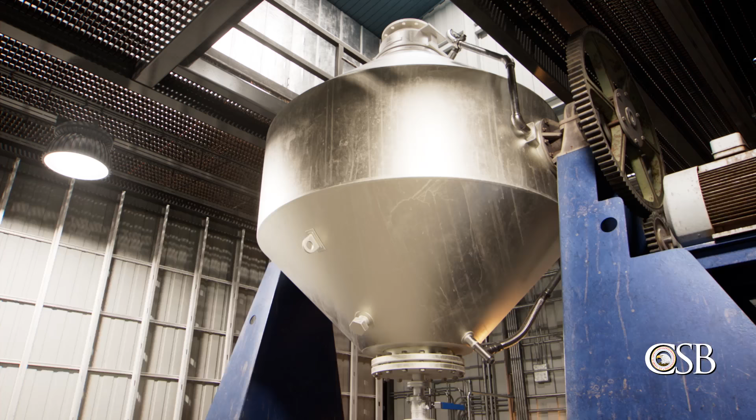December 8, 2020, the Optima Belle chemical facility in Belle, West Virginia. One employee was killed and 2 others were evaluated for respiratory irritation when a pressure vessel exploded, causing a fire and toxic chemical release. Our report identifies several factors that led to this tragedy. In particular, we have found that gaps in existing regulations do not adequately protect against hazards presented by reactive chemicals. This long-standing safety gap must be addressed.

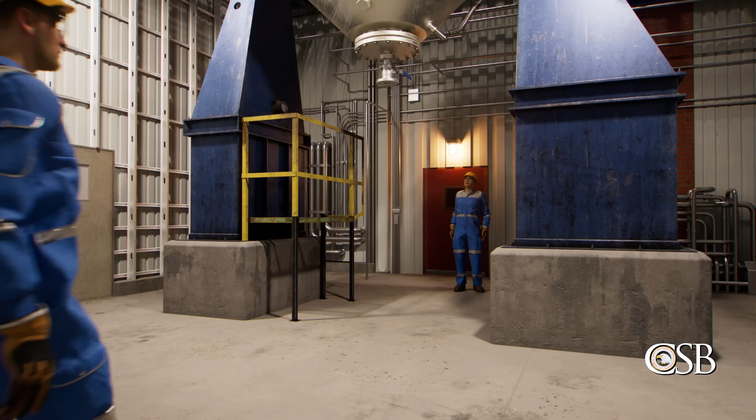Optima Belle is a toll manufacturer, or a company contracted to provide chemical processing services, typically using its own equipment. On the day of the incident, Optima Belle was working on behalf of Clearon Corporation to conduct a batch tolling operation. The tolling operation involved Optima Belle dehydrating a chemical called CDB56.

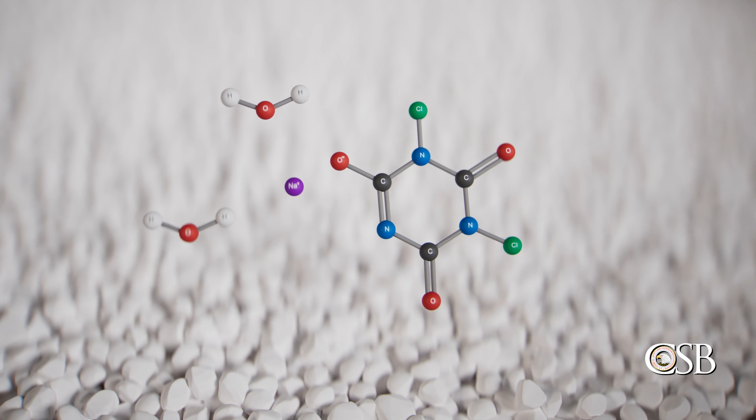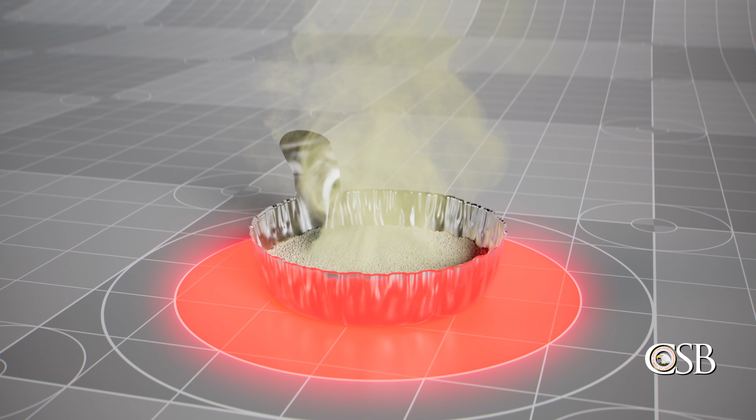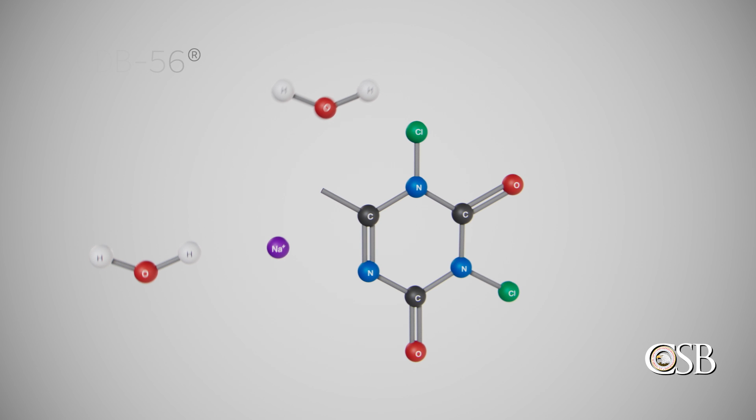CDB56 is a white powder used as a source of chlorine for cleaning and sanitizing products. When CDB56 is exposed to high heat, it can decompose and release chlorine and other toxic substances. The batch operation was intended to dehydrate CDB56 to transform it into a different compound that Clearon calls CDB63. CDB63 is a white granular material used for water chlorination in swimming pools, as well as in detergents and bleaching agents. Like CDB56, it can also decompose and release toxic chlorine when heated.

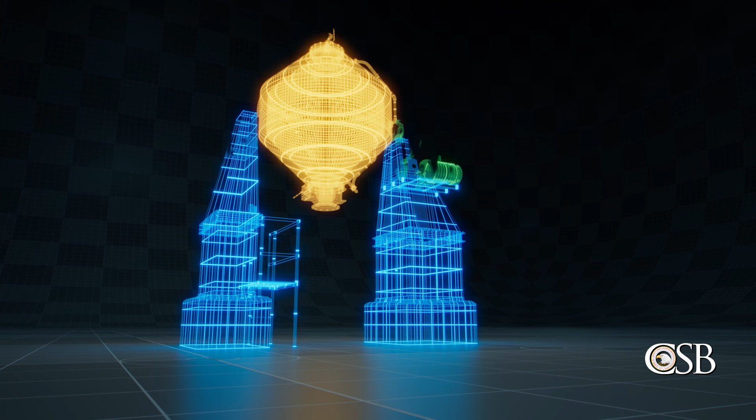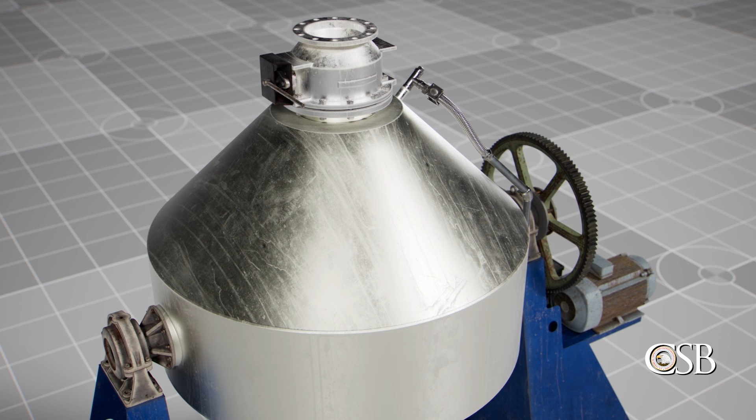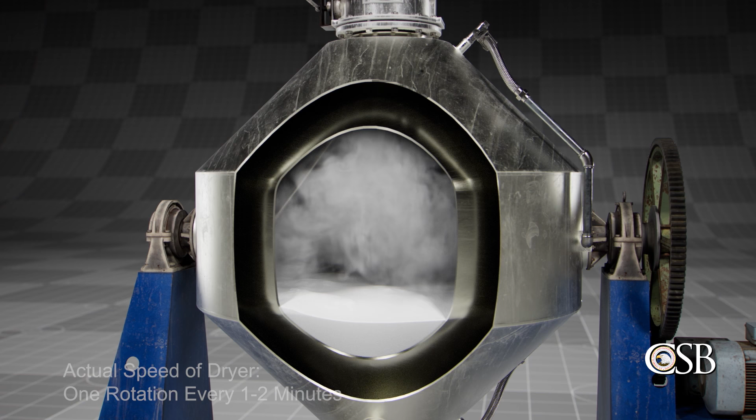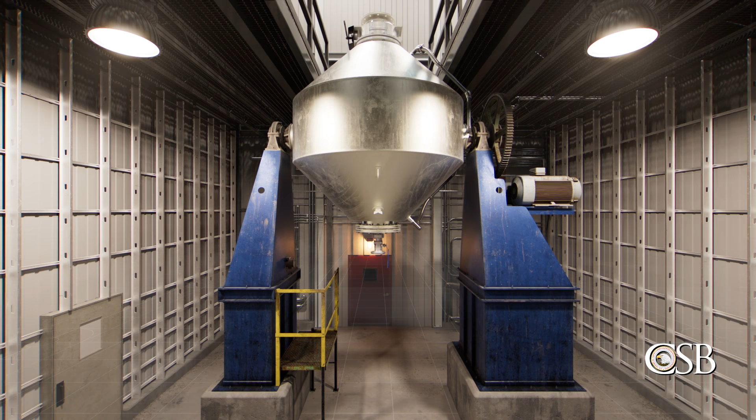For the batch dehydration process, Optima Belle planned to use a type of pressure vessel called a rotary double cone dryer. Clearon, however, had never before used this particular kind of dryer for dehydrating CDB56. Therefore, Optima Belle developed a new procedure for the dehydration operation. Their plan was to heat the compound by applying steam to the jacket of the rotary double cone dryer, while the dryer rotated to tumble the contents inside. Equipment would be used to create vacuum conditions in the dryer to help remove any gases produced, such as water vapor. Optima Belle, however, did not realize that heating CDB56 inside the dryer could cause the compound to decompose.

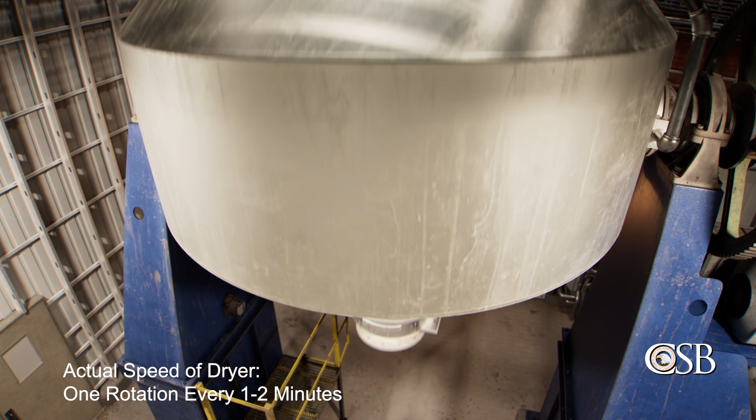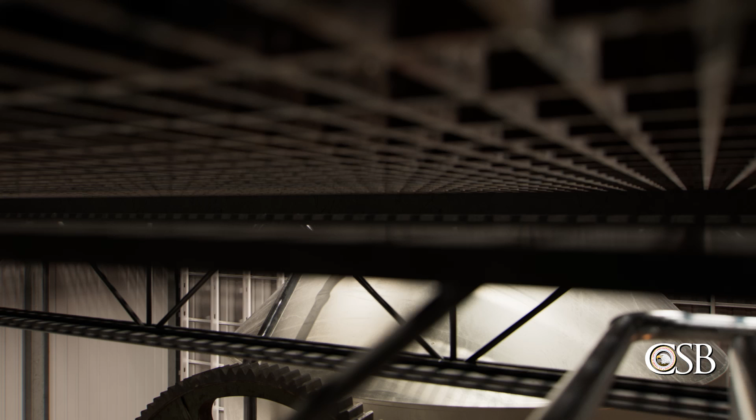On the morning of December 8, 2020, Optima Belle employees started the first of 4 planned batch operations to dehydrate the CDB56. They applied heat to the dryer, and workers from both Optima Belle and Clearon monitored the progress. But by late afternoon, workers observed some operational problems. They stopped the dryer to troubleshoot. About an hour later, they restarted the dryer's rotation, and steam was reintroduced to the dryer's jacket.

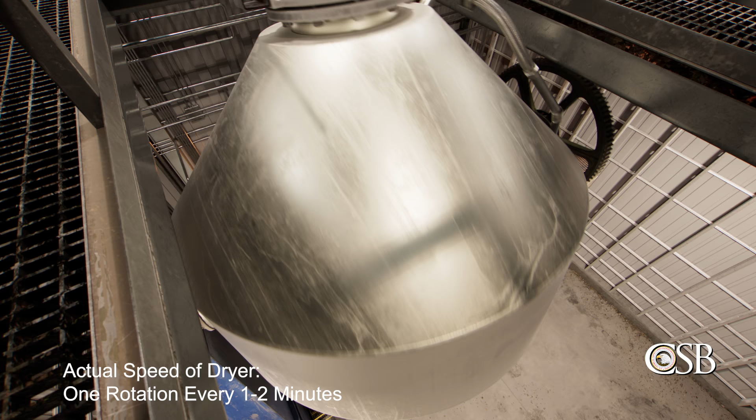But problems persisted. A sample of material taken from the dryer around 7:30 p.m. showed that moisture levels of the compound were not decreasing as expected, and now the white material contained dark specks. After Optima Belle texted Clearon about the issue, workers stopped the flow of steam to the dryer's jacket and stopped the rotation of the dryer to investigate the cause. Both Optima Belle and Clearon workers suspected that the dark specks could have been due to corrosion of 2 stainless steel valves on the dryer, which was otherwise constructed of a corrosion-resistant material.

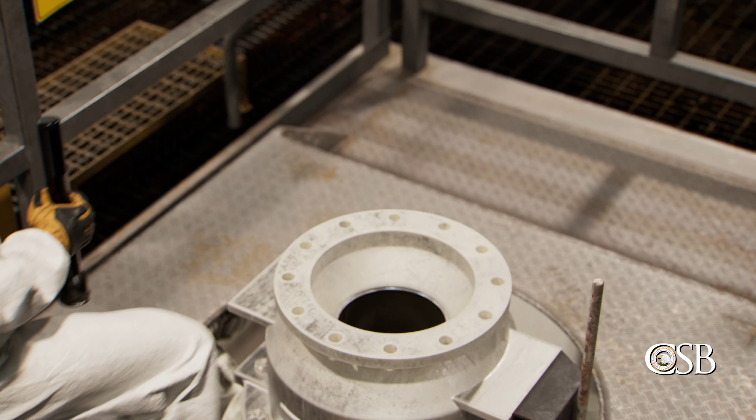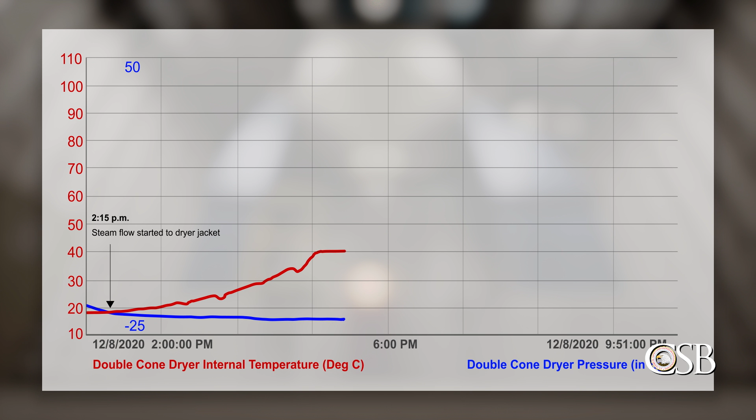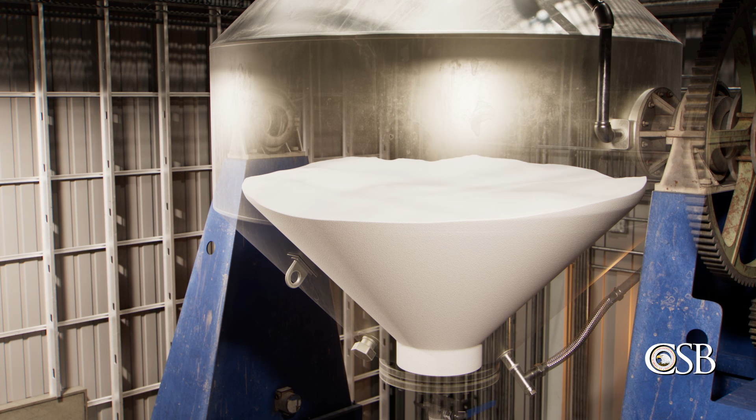Later, an Optima Belle employee told the CSB that when looking inside the dryer to investigate the suspected corrosion, the compound inside appeared lumpy with a yellowish tint and smelled like chlorine. While the workers were troubleshooting, the internal temperature of the dryer continued slowly increasing, even though no steam was flowing into the dryer's jacket. That is because, unknown to the workers, the earlier heating of the dryer had likely caused the compound inside to start decomposing, and a dangerous runaway chemical reaction was now underway.

Workers continued troubleshooting, and by 9:30 p.m. Optima Belle and Clearon agreed to stop the batch operation for the night and continued to investigate the cause of the black specks the following day. But at approximately 9:40 p.m., the decomposition reaction underway in the dryer increased rapidly, causing the temperature and pressure inside the dryer to spike. Within minutes, the dryer catastrophically exploded.

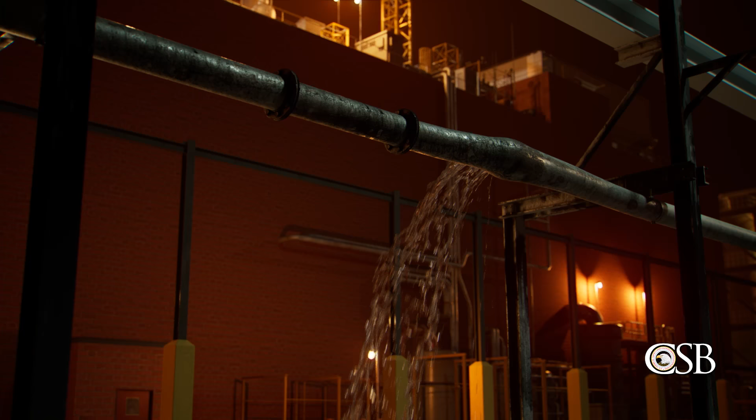Metal debris from the explosion struck a nearby methanol pipe, causing it to rupture. The released methanol ignited, and a fire broke out. Other metal fragments from the dryer were found up to a half-mile from the site. One Optima Belle employee was killed. 2 others were evaluated for respiratory irritation, and 1 member of the public reported an injury related to the explosion.

The CSB launched an investigation and found 5 safety issues contributed to the severity of the incident. They are process knowledge management, thermal hazard assessment, equipment selection and design, tolling of hazardous materials, and regulatory coverage of reactive hazards. The first safety issue is process knowledge management.

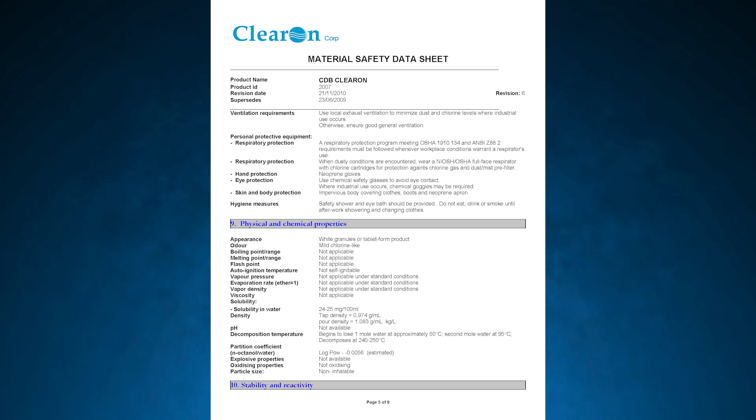As part of their tolling agreement, Clearon provided a technology package to assist Optima Belle in the development of the design and operating procedures for the dehydration process. But the CSB found that Clearon's technology package was inadequate and lacked critical known information on the decomposition of CDB56. For example, Clearon's own safety data sheet for CDB56, which was included in the package, listed its decomposition temperature as between 240 and 250 degrees Celsius.

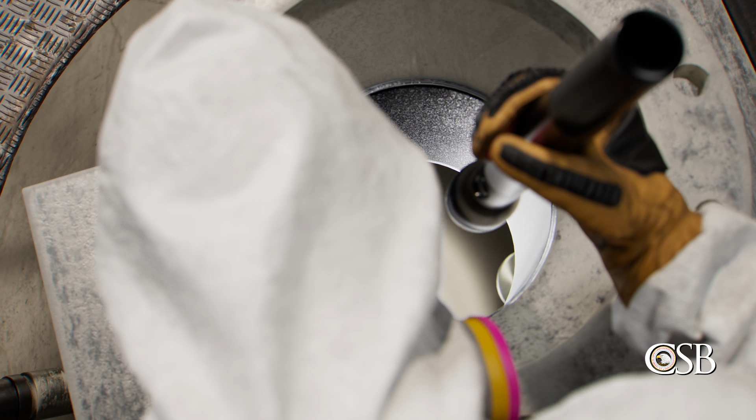But the CSB found that in the 1970s and 80s, a Clearon predecessor had conducted testing that showed CDB56 could decompose at much lower temperatures. These findings were documented in a report that Clearon had in its possession, but did not provide to Optima Belle as part of the technology package. Post-incident testing of the material confirmed that CDB56 could begin a runaway decomposition at just 81 degrees Celsius. Because Optima Belle was not provided this crucial information, the company believed the dryer temperatures would be low enough to avoid a runaway decomposition reaction by design.

Accurate process and product knowledge is essential for the safe operation of chemical processes. There can be little expectation of safety if the companies operating a process don't fully understand the chemicals and their associated hazards. Our investigation found that Optima Belle lacked crucial information on the decomposition of CDB56.

Accordingly, we found gaps in the ways that Clearon maintained and managed its key process knowledge, particularly in the way that it managed that knowledge with respect to its toller, Optima Belle.

As a result, the CSB made a recommendation to Clearon to develop and implement a comprehensive process knowledge management program, or evaluate and revise existing process safety management procedures to ensure consistency with industry guidance publications. And the agency recommended that Clearon update its CDB56 safety data sheet to more accurately represent the known hazards of the compound. The second safety issue involved in the incident is thermal hazard assessment.

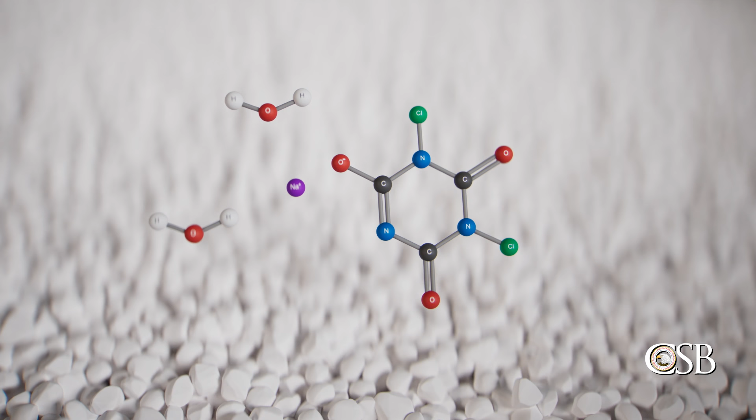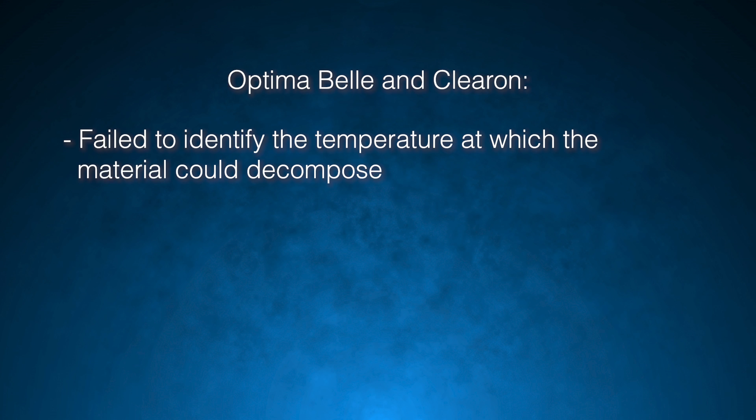The CSB found that both Optima Belle and Clearon failed to effectively assess the hazards of CDB56 and the batch operation. For example, both companies failed to identify the temperature at which the material could decompose, failed to conduct adequate literature searches for public or internal safety data, and failed to use readily available reactive hazard screening methods to assess the reactivity of the material.

Had Clearon or Optima Belle performed a thorough thermal hazard assessment, the parties could have understood the hazards of the dehydration operation, and the explosion could have been prevented.

There are many publicly available tools that companies can use to screen new or existing chemicals for reactivity hazards. Some of them are simple screening tools that can be used to quickly determine if further research is required. Others, like differential scanning or accelerating rate calorimetry, provide detailed, quantitative lab results that can be used to design a safe process. Using these thermal and reactive hazard assessment tools and developing processes accordingly can prevent tragic accidents like the Optima Belle explosion.

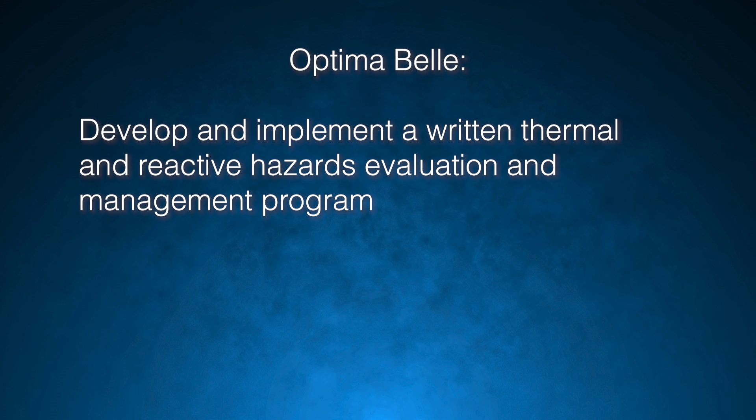In its report, the CSB recommended that Optima Belle develop and implement a written thermal and reactive hazards evaluation and management program.

The third safety issue that contributed to the incident at Optima Belle is equipment selection and process design. Optima Belle used existing production equipment for the batch tolling operation, but the CSB learned the equipment was not designed, sized, or re-engineered for the process.

As a result, the dryer was unable to quickly cool the contents if they became overheated, nor was it able to relieve the pressure generated during a decomposition.

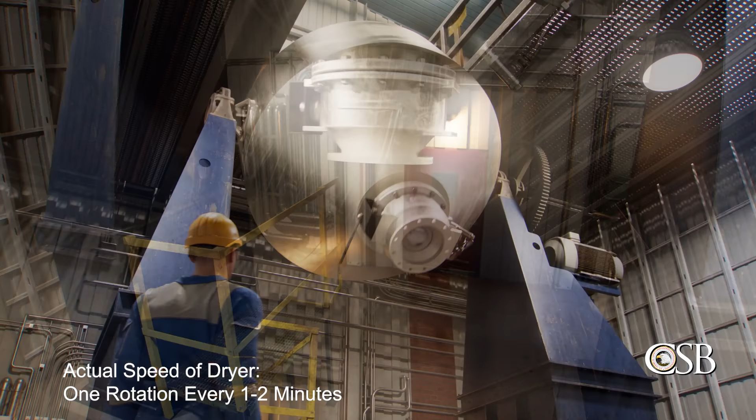On the day of the incident, Clearon and Optima Belle essentially conducted an experiment on a new method to dehydrate CDB56 at full production scale. This was done without first experimenting at a laboratory or on a smaller scale, which could have alerted the company of hazards and led to changes in the process. Instead, the end result of this decision was a catastrophic explosion.

We found that Optima Belle's pressure relief system for the dryer was not designed or evaluated to relieve the pressure produced by the decomposition of CDB56.

When using existing equipment for a new process, companies need to ensure that the equipment design is appropriate for the proposed new process. Had pilot or lab scale studies been conducted, Optima Belle and Clearon likely would have gained additional data on CDB56 and improved process knowledge. This might have led to changes in the equipment or process design, potentially preventing the explosion.

The fourth safety issue found by the CSB is the tolling of hazardous materials. Companies often augment in-house production by outsourcing chemical processes and other operations. These agreements are called tolling contracts.

Clearon established a tolling contract with Richmond Chemical, a tolling broker, who in turn contracted with Optima Belle. The Center for Chemical Process Safety, an industry organization, provides guidance for safe and effective tolling arrangements. But the CSB found that neither Clearon nor Optima Belle adequately followed that guidance.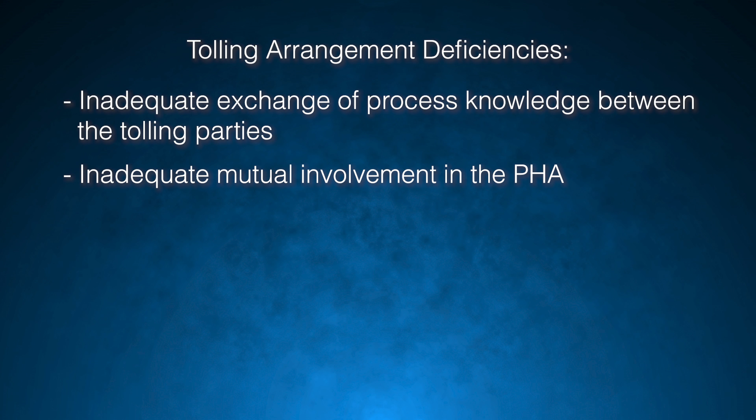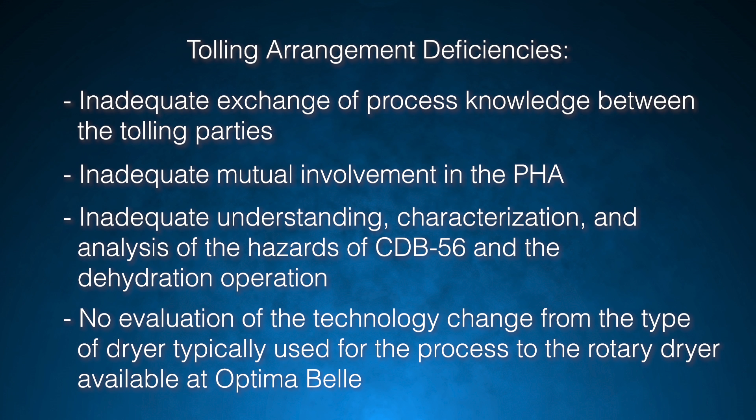Their deficiencies included inadequate exchange of process knowledge between the tolling parties, inadequate mutual involvement in the process hazard analysis, inadequate understanding, characterization, and analysis of the hazards of CDB56 and the dehydration operation, and no evaluation of the technology change from the type of dryer typically used for the process to the rotary dryer available at Optima Belle.

Outsourcing the production of a hazardous material does not outsource the responsibility for process safety. Effective process safety and the prevention of a catastrophic incident are responsibilities that should be shared by all parties involved in a tolling operation. As a result, the CSB recommended that both Optima Belle and Clearon develop and implement a written program for tolling process design and equipment selection using available industry guidance.

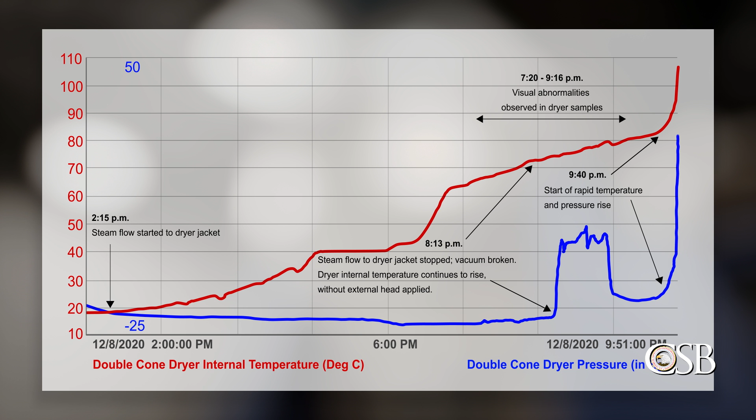Finally, the fifth safety issue that contributed to the incident at Optima Belle is regulatory coverage of reactive hazards. CDB56 is a reactive chemical that can undergo a self-accelerating decomposition when heated. At Optima Belle, the decomposition led to a catastrophic explosion, fire, toxic emissions, and the death of an employee.

Yet this chemical, and many such reactive chemicals, are not regulated under OSHA's Process Safety Management Standard or the EPA's Risk Management Program rule. Had CDB56 been covered under those regulations, Optima Belle would have been required to implement risk mitigation and management systems that could have prevented this incident.

The CSB has a long history of investigating reactive chemical incidents, including producing a 2002 study in which the CSB called on OSHA and the EPA to expand their standards to address reactive chemicals and their hazards. To date, however, neither agency has acted on our recommendations.

Therefore, in its final report, the CSB reissued its 2002 recommendation to OSHA to amend the Process Safety Management Standard to achieve more comprehensive control of reactive hazards that could have catastrophic consequences.

And the agency reiterated its 2002 recommendation to the EPA to revise the accidental release prevention requirements to explicitly cover catastrophic reactive hazards that have the potential to seriously impact the public, including those resulting from self-reactive chemicals and combinations of chemicals and process-specific conditions.